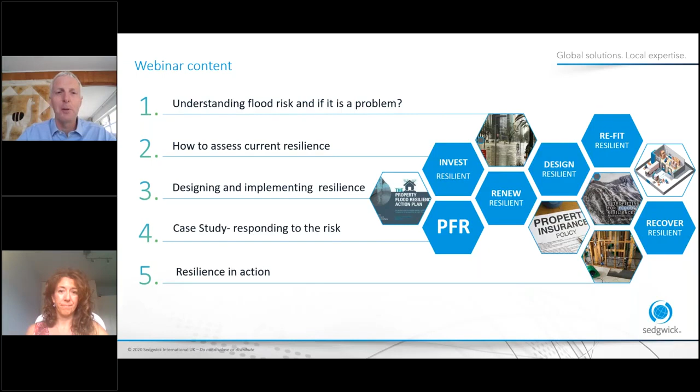So I'm going to talk through the content you see here. I'll talk to the first four sections and then hand over to Bev, who's going to look at resilience in action. I'll focus on the recovery stage, and Bev will look at the possibilities for renew and refit, the points at which you can put resilience in place.

So let's start by thinking about what risks we've really got to be concerned about. Is flooding something you should worry about? Well, obviously I'm going to say yes, aren't I, that's why we're here. But I've got some data from the Environment Agency's new flood and coastal risk management strategy, which sets out their concerns for the future.

One billion people are estimated globally to be at risk of flooding. The really important stat, I think, is that they expect a 35% increase in rainfall by 2070, and we're doubling the building on floodplains. If you're going to do that, the problems are going to get worse.

So is this as bad as it's going to get? No, we think it's going to get worse. Here's some data from Business in the Community, a charity dealing with SMEs, looking at impact. You can see the significant impact of the February storms in millions of pounds, but also the number of businesses that failed to reopen after significant floods. We're talking high numbers that don't survive, and with the number of lost days, the cost is significant.

The final point here is how government strategy is changing, because the government used to say don't worry, we'll fix it, we'll build you defences. But most flooding isn't from rivers, and even the flooding that is from rivers isn't just from rivers, it's from small water courses. So if only half the flooding you might be concerned about is from rivers, and the government are really only trying to defend against half of that, you're only looking at a quarter of the risk covered. If that's a flood resilience strategy, I wouldn't be very happy covering only a quarter of the risk. That's why I think this is an important issue to consider.

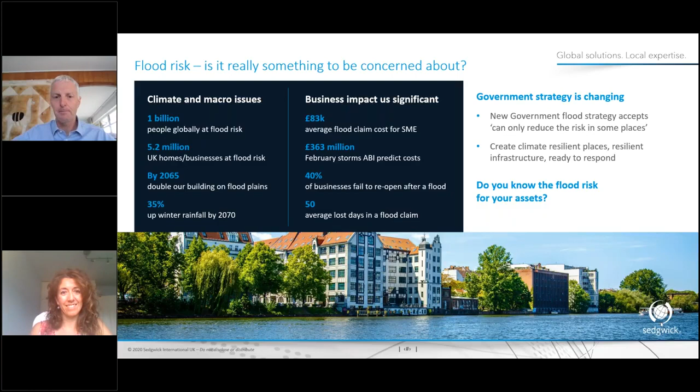So looking at a summary of the methodology you need to follow: the code of practice is the how-to guide. Before it was launched, Bev and I had a nice trip to the House of Parliament and a drink, which was really nice, a nice trip out. We've been involved a lot in the production of this, and it shows you how to approach making yourselves more flood resilient.

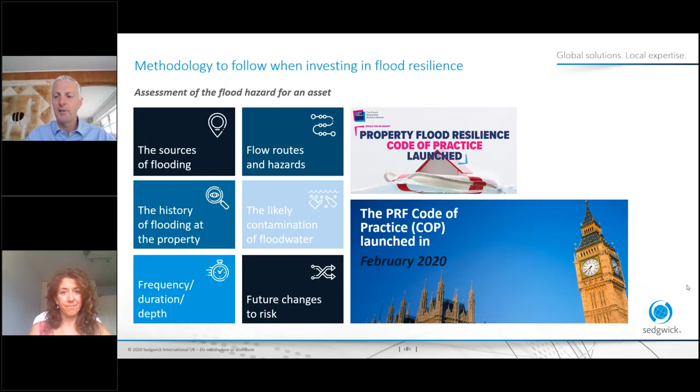You're looking at issues such as the sources of flooding, which we'll look at in a minute, the route the water's going to take, the hazard involved, the history of that particular location, why the flooding occurred, how often, how deep it is, how likely it is to occur again, contamination concerns, and all of that wrapped up with the risk of higher flood risk in the future. With all of those in mind, I'll start looking at the particular flood risk types.

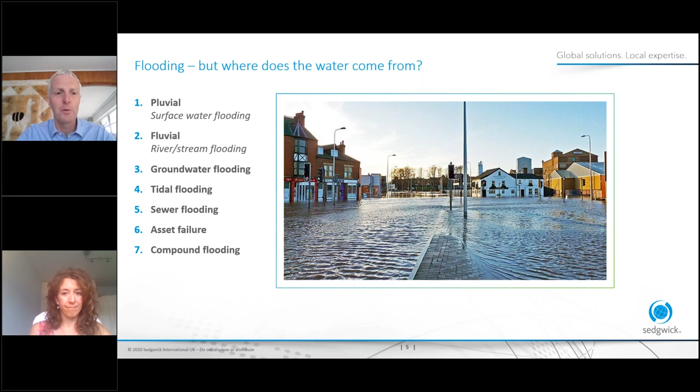You probably know most of these anyway, but it's really to set the scene. So pluvial, we're talking here about surface water - impervious surfaces, we build over our green spaces. It's talking about really dry conditions in the summer where the ground is so hard that water doesn't absorb. So that's your surface water flash floods.

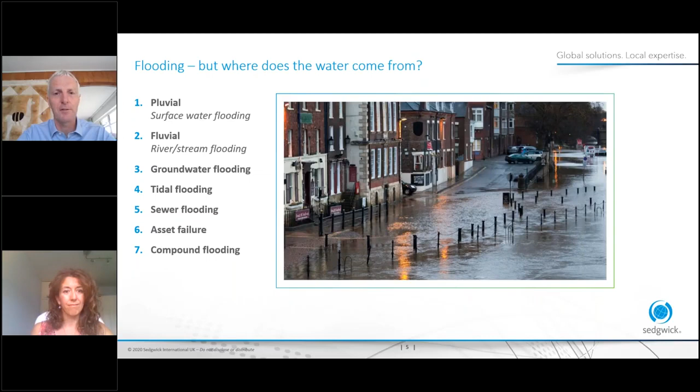Fluvial, so this is rivers and streams, but everybody thinks it's about a big river, but it's about the tiny stream at the back of your factory, which hasn't been cleared out and gets blocked. That's more likely to cause you a problem.

There's groundwater flooding. This is basically when the level of the water table is at ground level. So if you see a field looking like that a day or two after rain, that's because that is basically the groundwater level sitting on the surface. A real problem for long-term flooding.

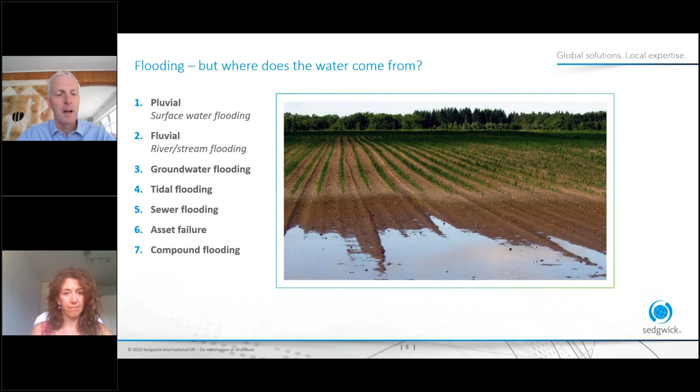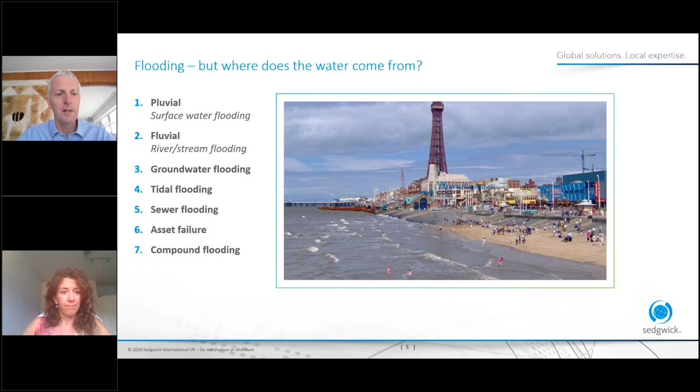And then we've got tidal flooding. The East Coast is particularly prone to tidal flooding, storm surges, which we've had a couple of in the last 10 years. Next is sewer flooding - this is like the sewer and water supply to your property, which you can't predict, but just be aware it's another risk.

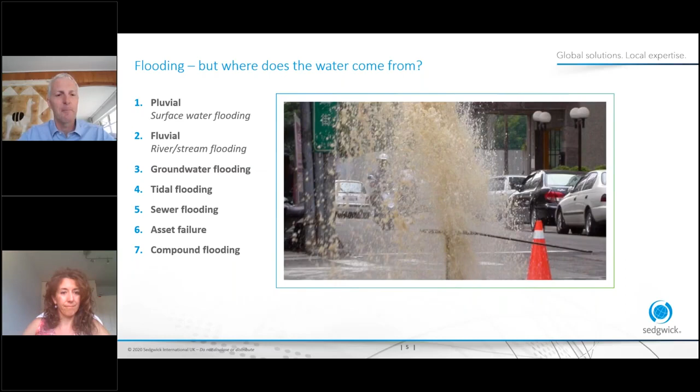Now this one, asset failure - everyone goes, oh, there's going to be a dam that's going to break, is there? And then last year we had the risk of a village being inundated. But there's also small dams that farmers will have to store water. So there are risks that could be surrounding an asset.

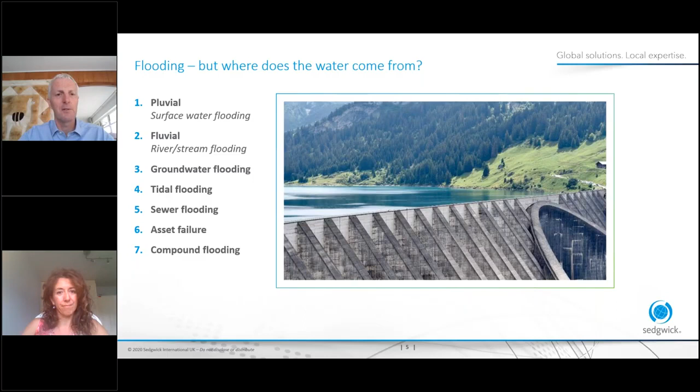And the final one, which is always tricky, is compound. Now, what flooding has caused that pitch, you might ask? Well, it could be all or some or none of the above. So the question is, you have to really understand what the possible cause is, in order to protect against the risk.

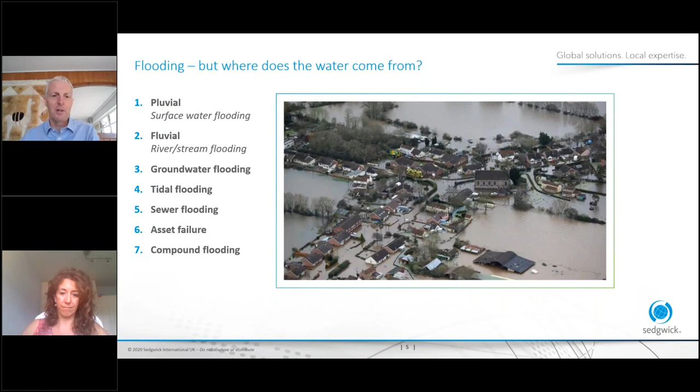Right, so let's have a look at the risks - as I said at the start, if we've got more properties at risk of surface water flooding and the government can't defend against that, we've really got an issue we need to start being concerned about. Flooding is not just because you're sat next to a river, and therefore understanding your flood risk matters. A surface water flood that goes into your factory or your offices to 100 mil doesn't sound as catastrophic as what you see on the telly, but it will stop your business trading.

So it's really, really important to have an understanding of the types of flood risk, and don't just assume that because you're not near the coast or near a river that your flood risk is not going to be something to worry about.

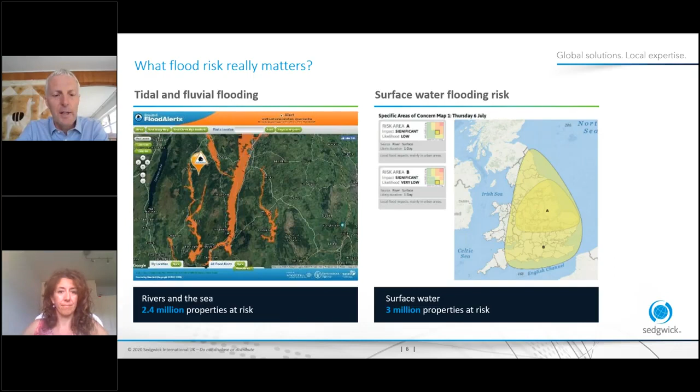Right, so we're going to look next at how we look at the stages of understanding the risk to the asset that you're responsible for. So source, which is where's the water coming from - here's a nice schematic. Is it a combination of rainfall and groundwater that's causing your problem? Or is it a tidal surge? Or is it a combination of two or three things together? So look at where the water will come from.

Then you're looking next at the pathway. So you actually physically do this on site - you would walk around, you drive to where you're going, and you start looking at topography and the landscape. And when you get there, you're walking around the building to really understand how the water would access that building, how would it get there?

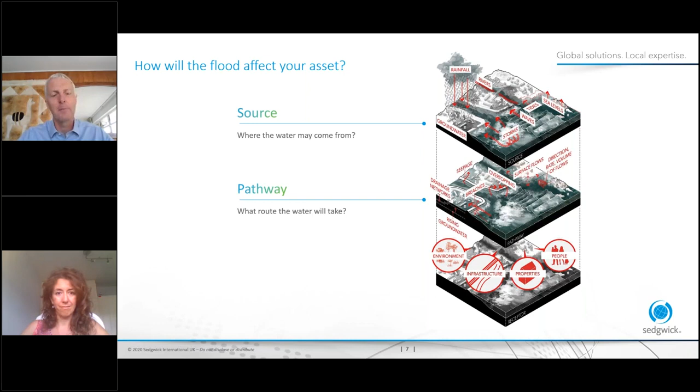And finally, what is the receptor? So what's the asset you're protecting? Is it a substation? Is it a factory? Is it an office? Whatever it is.

So that approach also means that you've got to consider things like, as I mentioned before, the history of flooding, contamination, and the duration and frequency of floods. But the basic principle is you have to think of it in those sort of logical terms in order to really understand what the risks are.

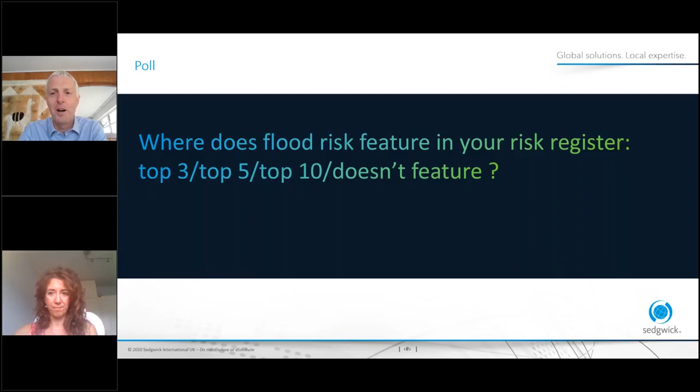Great, it was really encouraging that predominantly you are thinking about flood risk. So we're hoping what we'll be able to show you today, as we move on to the next slide, is how you do this really effectively. So if it's on your list of things to worry about, how do you really make it happen in terms of looking at the assets you're concerned about?

So I'm going to take an example of recover resilient. This is about when you've been flooded, if that ever was to happen, how would you recover in a resilient way and a cost-effective way?

So there's a case we're dealing with as a business, an events company in Derby. They flooded in November. There's no cover for improved resilience in the policy, so it's about funding by the business. As part of the claims process, we did a resilience survey, engaged with insurers who were really wanting to help the customer and find a way to protect the business better.

The outcome, to summarise, and we'll go into more detail as we go through, is this allowed flood cover to be maintained by the customer agreeing to implement these measures. Normally they get on with it straight away, but COVID has delayed the implementation. But that's just a one-off situation. So let's have a look at this example in a bit more detail.

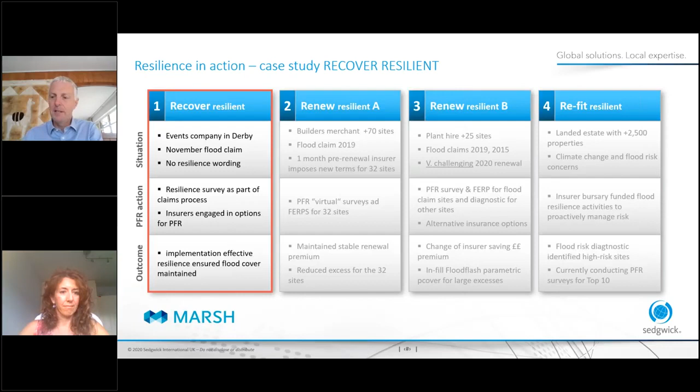So up to 1 metre of water went in, happened really quickly. Really preparations would have had to be excellent to stop it, and open to doing things differently.

So it's worth thinking a bit about the building. It's a portal frame with 2 skins of blockwork, joined together, the 2 buildings joined together with a link, so it's a bit messy in terms of the construction. And they've got mezzanine offices, but everything else on the ground floor. So that's the sort of building.

As far as resilience, they've got a lot of really good racking in there to store things, so that really helps in terms of keeping things off the floor. They've got sewing machines for manufacturing, a little manufacturing area, normal office function, toilets, canteen, area for customers. So it's quite a good mix because it's got all sorts of bits in that property, which makes it a good example of the sort of issues we face.

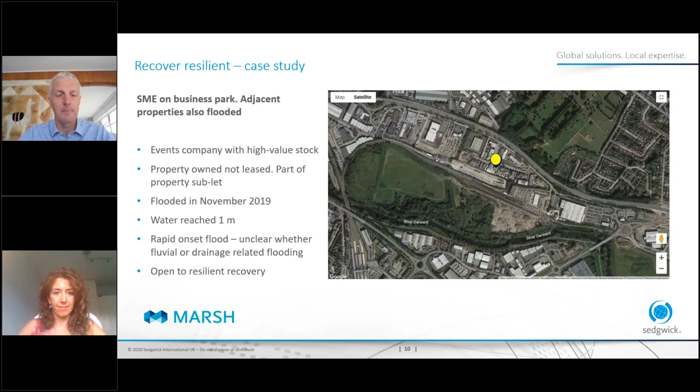Okay, so let's have a look at how this fits into the code of practice. The code of practice talks about lots of key stages, so it's really breaking it down into obvious chunks: the flood hazard assessment, property survey and options development. Getting to what you're going to do and why you're doing it is what we're going to do now.

Also absolutely crucial is getting the right contractor in stage 4 for construction, the commissioning and handover, so you know how the products and the system work. And finally, obviously crucial, these things have got to be maintained and tested to make sure everything works.

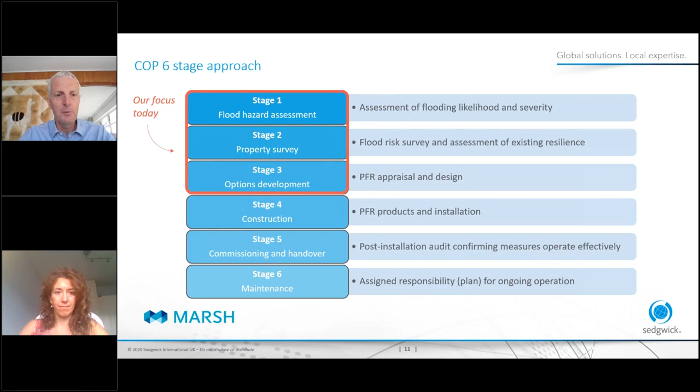So we'll move on to looking at the first step, which is looking at this particular site. We've got to look at the type of flooding, the likelihood and frequency. We've got to do all that good stuff with flood risk mapping and look at that particular property and see how that would be affected. So on this particular example, it's an industrial estate, and it was flooded about 20 years ago.

The people currently in position weren't there then, so they asked some of the neighbours and learned a bit more. We only got anecdotal information about depths and things there. You can see it's close to the river, but it's got problems regularly with the drains and surface water flooding outside the front of the property and down the street. So they're aware there's some issues there with surface water.

So what we identified, as you see from the risks here, is that for a 1 in 100 year flood, or what we call a 1% annual chance flood, only low levels. So for fluvial and pluvial, we're only talking about sort of 250 millimetres. That moves up to really big numbers if you have a really significant fluvial flood. But when we looked at balancing the risk, we thought it would be reasonable to look to defend against 1 metre in terms of a resilience approach to deal with most flooding that could occur at the property.

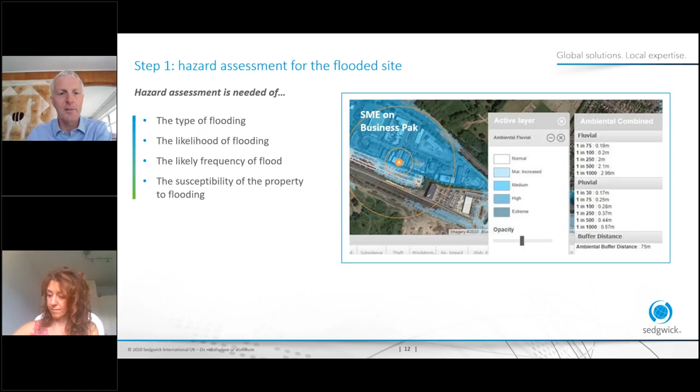Okay, so let's have a look next at the next step, which is the building survey. What we're talking about here is how we approach it. So if someone from Bev or my team would go out and do a survey, they'd be looking at the construction of the building, what it's built of, or other services supplied to the building, and some of that was a good conversation with the building representative there, who understands the building.

We really want to know how it goes together and what they know about it. We will assess the current resilient measures - there may be measures in place, or there'll be natural resilience of the building. Then we look at the option to try and decontaminate the building, because if this building gets wet and affected by contamination, the question is what would have to come out, not just to dry it, but to make it safe and clean afterwards. And you're looking at adjacent structures, etc.

So in order to think about this, I thought I should be really clear about what flood resilience is. Flood resilience can be a mixture of two approaches. Resistance, which really does what it says on the tin - the way you use materials or approaches or barriers, whatever it is, to manage the water entry. So you're trying to keep the water out, either entirely or to a large extent. And it's important that it doesn't always have to be completely excluding water.

And flood recoverability, which is the products and the approaches you take to mean that the actual building material and the functioning of the home or business, whatever it is, is not unduly damaged. That means the water can come in, do limited or no damage, and go out again, and you can get back on with your life or your business.

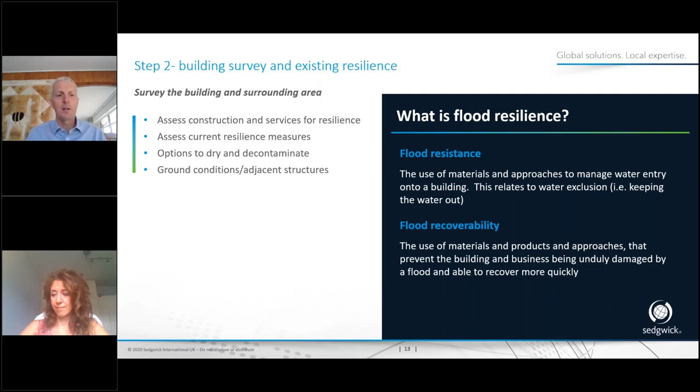So if we have a little look at this particular building, I'll give you a flavour of what we did. If you look at the structure there, on that top left-hand corner, you've got profile sheeting butting up against the brickwork. Now what happens here, when I started looking in a bit more detail, is that it's all blockwork behind that, but there's basically a hole joining those two buildings, or not joining those two buildings. So you have to look hard, otherwise the water - you do all these fantastic door barriers and everything, flood doors - and then it just pours in the gap between. So you really have to interrogate.

So the middle picture you'll see is clad, front door there, and it's clad with cedar panels. Now, how is that constructed? How would the water get through there? So you're looking at that. You're looking at heights of doors and window levels. You'll see, when I walk around the back, I thought, oh, this is helpful - top right-hand corner, two buildings about a hand's width apart with pipes joining the two.

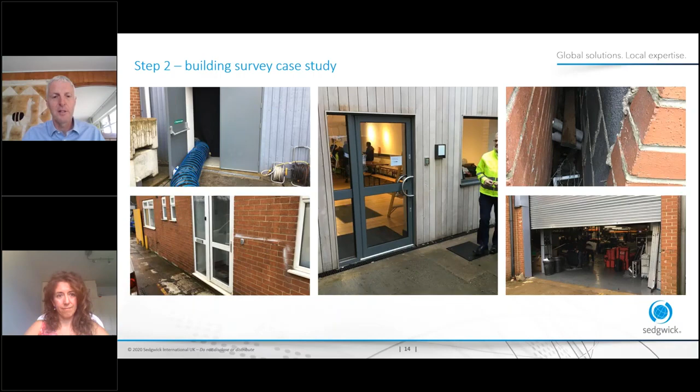Now, that's not that easy to deal with. You really have to look hard at the undergrowth to try and see the outside of the building and how it's built. You'll see they've got a nice wood floor at the entrance, which is not very resilient or recoverable. You can also see the type of roller shutter doors they've got. You need to look at the pipe penetrations, the cracks, all sorts of things around the building to understand how it's built.

So we look at this building and ask, how resilient is this building, and how resilient is the operation within it? The construction, concrete floor, is good. Plaster blockwork walls are very resilient.

The floor finishes aren't resilient, because that timber floor was warped, affected, and had to be replaced, which hadn't been done yet in that picture. The kitchen was non-resilient, as were the WCs and customer area. So all of it had to come out where it was affected, meaning they couldn't have people with welfare or cooking facilities, tea and coffee, or use toilets. That's a real problem.

Organisationally, they've got some really good racking and storage, with electrical equipment stored higher up. Fortunately, they'd just moved their offices to the mezzanine floor, which made a massive difference, because fundamentally their business could keep people coming in to actually speak to customers and keep things going. So that was really important, but there was no documented flood plan.

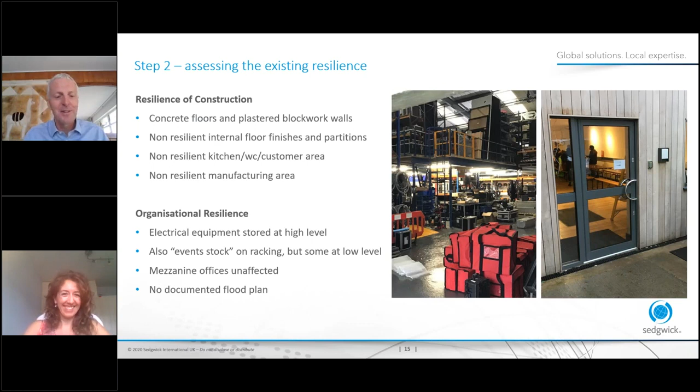The customer said, yeah, we sort of got one, it's not really written down—which is my shorthand for 'I haven't really got one,' but I don't think she wanted to admit that. So, on to the next slide, step 3.

Step 3 is options development. When I speak to the customer in this case, it was: right, we really understand the asset and you understand the risk you're at, and we discussed it. Now, what are you willing or wanting to invest in, and what are you trying to defend against? Are you saying you can't have water in this building at all?

If you're in food production or electronics, you might say, well, I just need to keep this water out—that's the only option. Others may say, actually, if some water came it wouldn't be a disaster, but I need the following bits of my business or operation to be running, whatever that could be for a charity or otherwise. So the decision is really whether you do a loss prevention approach.

Do you try to resist the water, saying you can't have a loss of any description and have to do whatever it takes? Or is it more of a loss reduction strategy, based on recoverability and resistance—whatever's most appropriate for the business? What I've learned is you just have to listen, really understand the business, speak to the people, delve into their operation and organization, and what would impact them, to decide on the strategy.

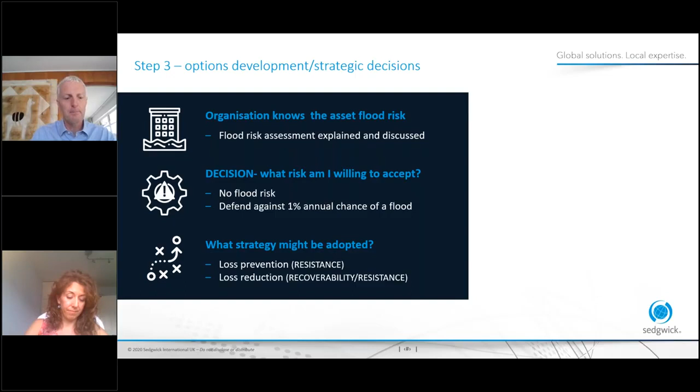So let's look at the options you could consider. If you wanted to keep the water out of a building or asset, you might think about a structural wall around the building. There's a really good example from Zurich, where they had a massive flood in a factory and built this massive wall around it as a case study. That was economic for them, but it wouldn't be for everybody.

Sometimes it would be a barrier, as you can see around a hotel or industrial unit. In the top right-hand corner, there are automatic barriers that come down and shut to stop the water getting in. You'll also see non-return valves in the drainage there to stop water backflowing. So there's all sorts of things you can do.

What we decided for this project was that it could structurally support a metre of water being kept out without causing structural damage. You couldn't put a temporary barrier in place because it was too close to surrounding buildings. The construction was okay, but there was a real risk of water leaking into the building, given it was an Australian standard portal frame structure—linked not very nicely—so we were worried about water ingress.

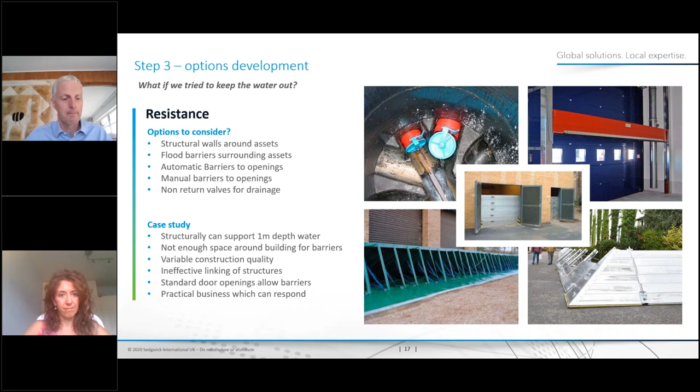So I thought to completely keep the water out was not practical, but we could massively reduce the risk of water getting in, and therefore change the whole outcome of a possible flood claim. So we took two strategies.

What if it got in a metre, what would it do? Well, clearly the manufacturing side would go, so there'd be some stock damage. The kitchen and welfare, even if recoverable, would take a lot of cleaning down, and there'd be time out of operation. So it would really be costly to say, I'm just going to let this building flood to a metre and have no impact or very little impact.

So we thought, well, what if we let it in? Literally, it got the concrete wet, but didn't affect the kitchen, WCs, or the flooring in the customer area, because that was more recoverable. How would that work? That really clearly became the way forward.

Try to keep the depth of water to a minimum, none at all hopefully, but if it was a long-term flood and it stayed there for a while, there'll be some leakage. Then you just have to decontaminate, and you could make this better.

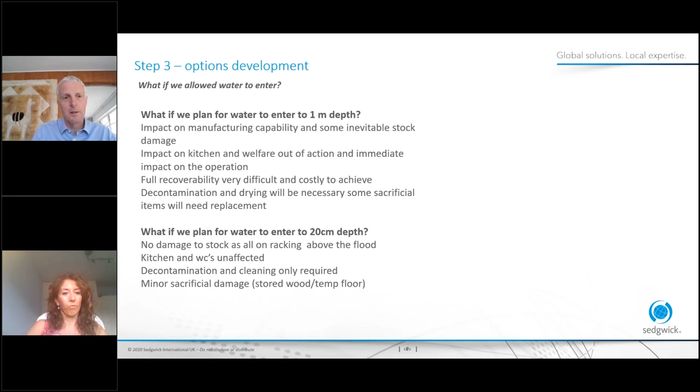So I'll move on to the next one, because I just want to show you quickly what this means in terms of what we did for resistance. So lots of cracks and holes in buildings. It's amazing when you walk around how many bits of it are falling apart. So we need to repair those.

We need to get an effective joint when those two buildings are adjacent to each other, so we put a build there to stop the water getting in. Flood barriers to door openings, non-return valves. We'll build a new structural junction where that profile sheeting was, that I showed you at the start.

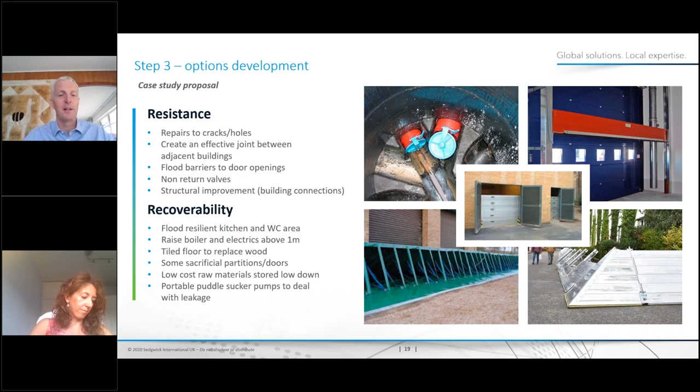Put a flood resilient kitchen in and toilets. We're raising the boiler, the electrics, a tile floor that looks like wood, which will look really nice but be recoverable. Store materials that you could throw away, like wood or something, at low level. So basically, we've got a loss reduction strategy there.

So then we said to the customer, well, okay, that's worth explaining how it got to this point. They couldn't apply the code because it didn't exist, it wasn't published when the flood happened. They couldn't get us involved earlier either, it came about serendipitously by Zurich saying, I think we can try and help this customer. So basically, I came in after the start of reinstatement, so we were able to help them, but not in all the ways we would have done if we'd been involved earlier, with the code released earlier. So we end up with this resilient strategy where we're trying to keep the water out as much as possible, but realizing some may get in and therefore be recoverable.

With the current stages, we're looking at implementing the measures, but COVID is obviously holding us up on that, in terms of production of the barriers and all these sorts of things. So key to this is this flood plan that delivers a proportionate response to the risk.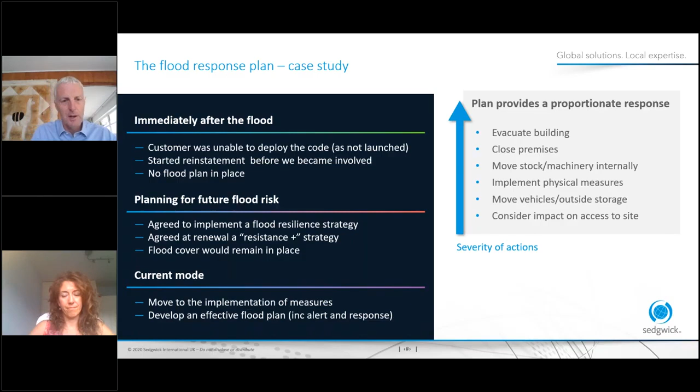If we just move on to my last slide, this is all about us trying to understand how we can protect that particular asset. EA warnings for river flooding can be frequent, and it's sometimes a problem that people lack confidence in taking action. There's big surface water flood issues here.

So we have looked at working with a company called Previsico, and I believe they're the only company that does live surface water flood risk warnings. The idea is to install a sensor in the river so we can see what the actual river level is, use the Environment Agency data for flood risk for rivers, but predictive data for surface water. So then they would get real-time alerts of when to take action, and whether it was a small risk or a flood risk that needs immediate action.

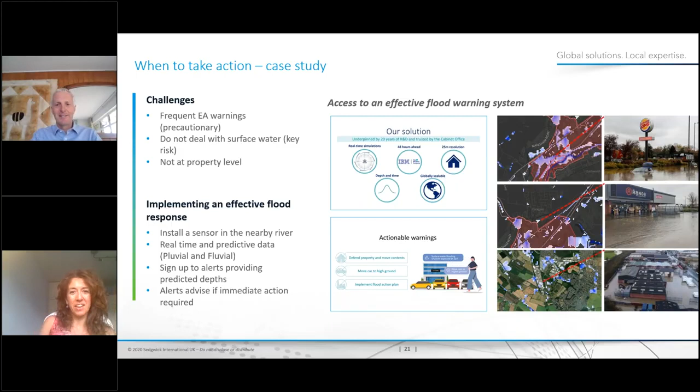Hopefully, as you're looking, you can see a few differences. I'm eagerly looking at the question window to see whether you guys can type in some of the differences you're able to spot.

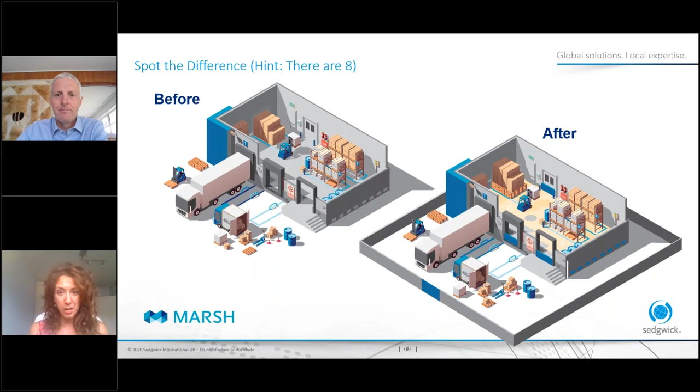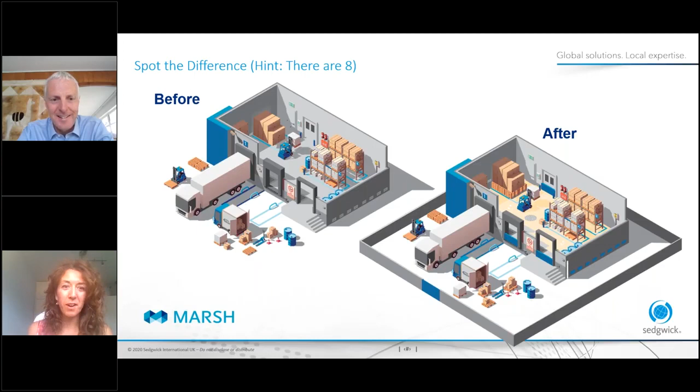Ian, would you like to give me a couple of others, my friend? Yeah, I've got to, now I'm under pressure. I think I might be on mute here. I don't know, no, I'm not on mute. I see my phone ring. Yeah, so we've got electrics raised, I believe, in one of our pictures there. Very good - that's important. Otherwise you're going to fry your electrics, and such a simple change to make.

Yeah, absolutely. And I don't think air brick covers have come up. This is a schematic, obviously, as Bev has shown, so you wouldn't necessarily have these in exactly the point they're shown on the diagram, but they give you a good example of what's there.

So when we were in Derby looking at the claim together, Ian, these were some of the key things that we saw, weren't they? Areas where potentially there were alternative ways that the water could enter the building, and those kind of things that in a traditional survey just wouldn't be picked up. What Ian hasn't mentioned is that both of us have been through the flood surveyors resilience training, and it opens your eyes and enables you to see your asset with a completely different view. For us now, when we're just going around looking at buildings, even my own home, I have quite a different perspective in terms of the ability to keep water out versus the scenario where water may have to enter and be quickly whisked away. And we call that living with water.

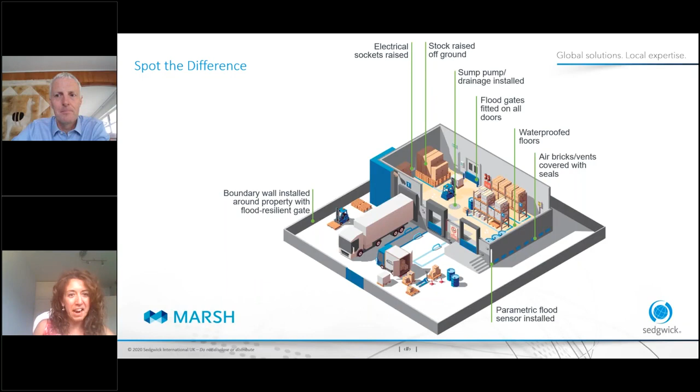Thanks very much. What I'm going to do now is just move on to some more details about flood resilience in action. Every day at the moment, I wake up and I deal with flooding. Ian's been talking today about what we call recover resilient, but in my world, I'm dealing with renew resilient, refit resilient, design resilient, and invest resilient.

Because in my job at Marsh Risk Consulting, I work with companies all across the spectrum, whether it's asset managers, infrastructure, water companies, manufacturing businesses, food companies, all of them have this thought that either flood risk or climate change is a factor or could become a factor. We've been incredibly busy this year and towards the back end of last year dealing with floods.

Also helping companies prepare for how they can handle floods. Part of this has been driven by the need to take appropriate risk management action. But in reality, part of it's also been driven by renewals. We now have a hard insurance market.

For any of you who've been through renewal or are going through renewal, you may be finding that if you have assets with flood risk, it's being called out and the terms that are being imposed upon you aren't very favourable. So in reality, I am doing a little bit of firefighting at the moment, helping companies who are having difficult renewals literally identify a strategy and a roadmap for taking action to both get better terms, but also the double benefit that that's then going to help them have a more resilient business.

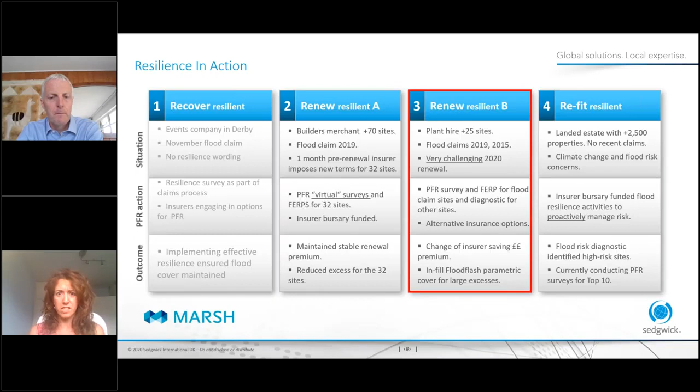This is where our new insurance coverages that are parametric come in as an infill. You can buy those as a standalone cover that sits and protects you for that amount of excess. So if you do some resilience work and take that parametric cover, those two things combined mean you don't have to retain £250,000 worth of risk on your balance sheet. We've just closed that.

Because of the saving they made on the premium and the relatively low cost of the parametric, they've got some money in the bank to do some resilience works. Because I'm sure some of you are wondering, how do we fund this? How expensive is it? One of the things Ian and I are working on is a tool and a model to help do that cost benefit analysis of which measures make most sense and stack up economically.

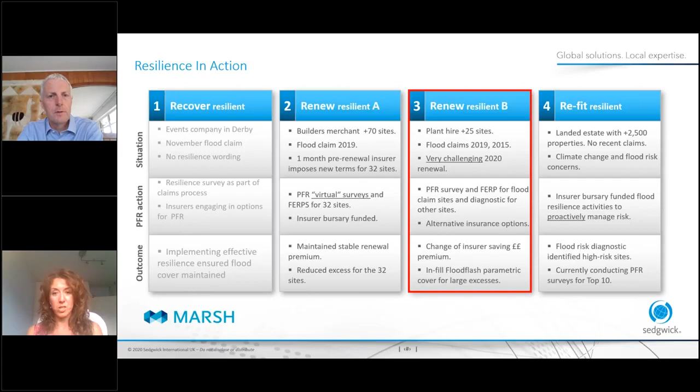So moving swiftly on to case study number 4.

This one is a landed estate with a large number of properties around the UK, very proactive in their mindset because they are in a way curators of the future of that business. So they have tasked us, we identified the key sites, they're currently going through a programme of works where they're developing the surveys and then doing refit schedules, and then we're actually training their in-house surveyors so that going forward they'll be able to do their own works to assess the resilience potential and make the right decisions.

So any questions you may have after this today about these case studies and others we're working on, absolutely shoot us a note. Emails for Ian and myself are at the end.

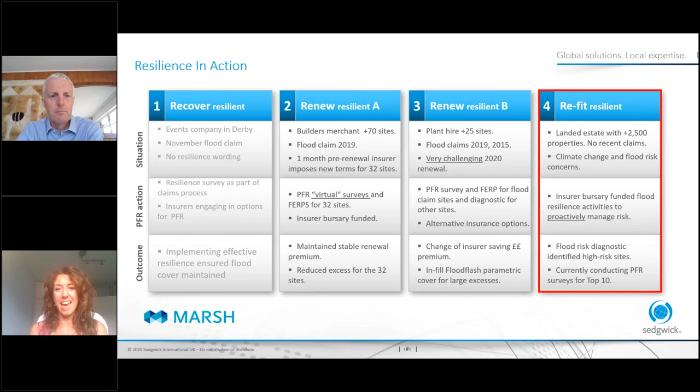So just moving on quickly, what I want to do is provide you with some final thoughts and, in a way, a call to action. Ian and I have today spoken about some practical ways in which we're seeing flood resilience in action. But I would remind you that if you have portfolios of assets, if you have assets overseas, if you have concerns about climate risk, if you're not just looking at it operationally but also looking ahead to TCFD and PRA disclosures for financial climate risk, these are all things where we can help you understand what that risk is today and put the right measures in place.

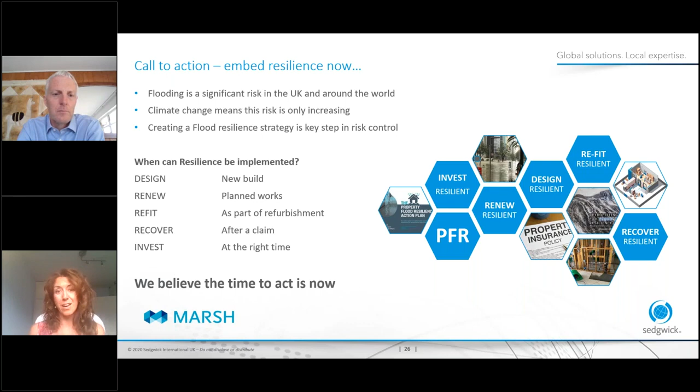So we like to talk about invest resilient, renew resilient, design resilient, refit resilient, and then recover resilient. And what we'd like to do after the session today is open our door to answer any questions you may have, just to help you make a difference on flooding and climate change within your business. Thank you.